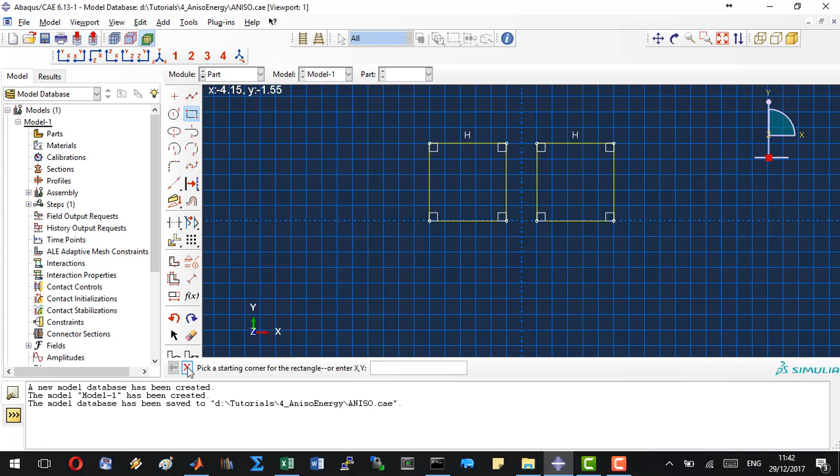Now we are at the sketch module. Let's create two elements. The first one will be 0.2, 0 until 1.2 and 1. The other starts at minus 0.2 and extends until minus 1.2, 1. When this is ready, click on the red X and click done. We can see that in one part we have two elements.

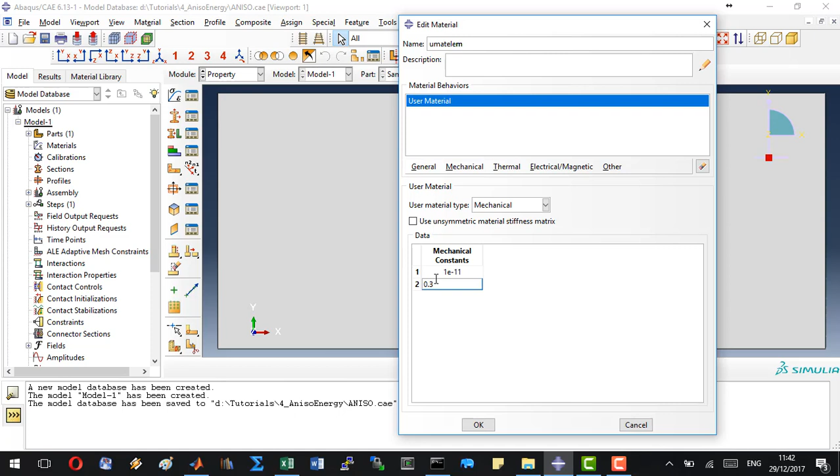These are going to be then processed further on. Let's click to the property module. Let's create our UMAT element where we have a user material with a very small stiffness and an arbitrary Poisson's ratio. We will add solution dependent variables as usual. This is going to be 16 as well.

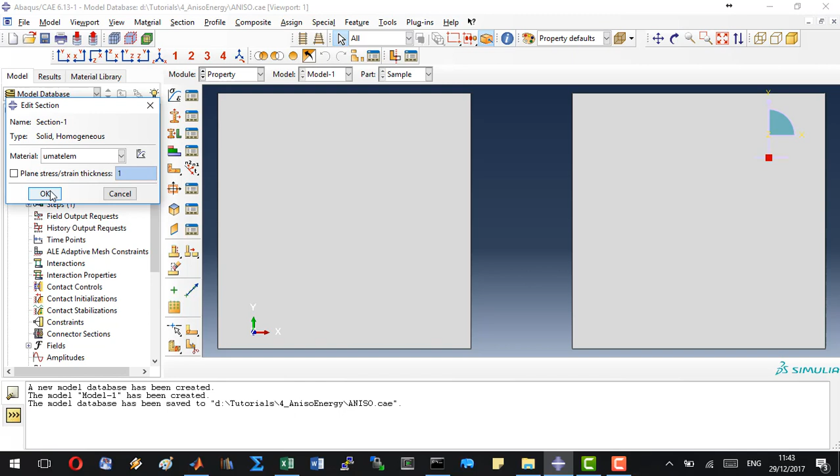Let's click OK. Let's create our section. This can be left as it is. Click continue. Make sure that the material is the UMAT element which we created earlier. Click OK and then create and assign the created sections to the part, or actually to the sets. Here we will create two sets. First one is going to be the isotropic set. Let's select the left element, click done. Make sure that the section which we have selected is section 1.

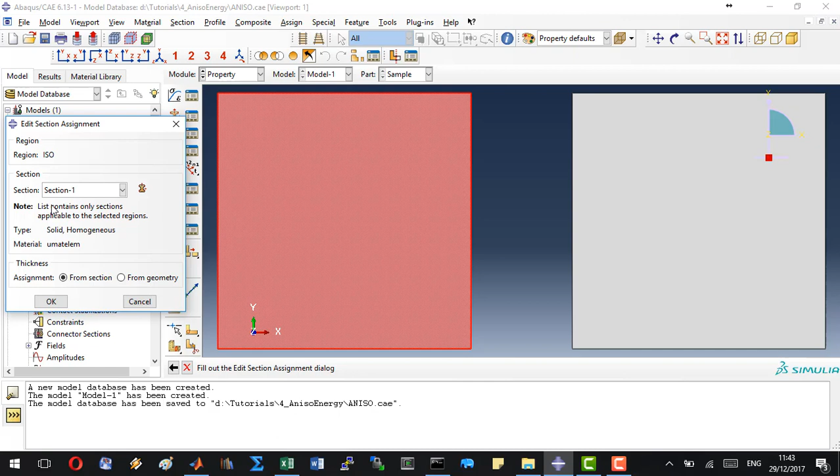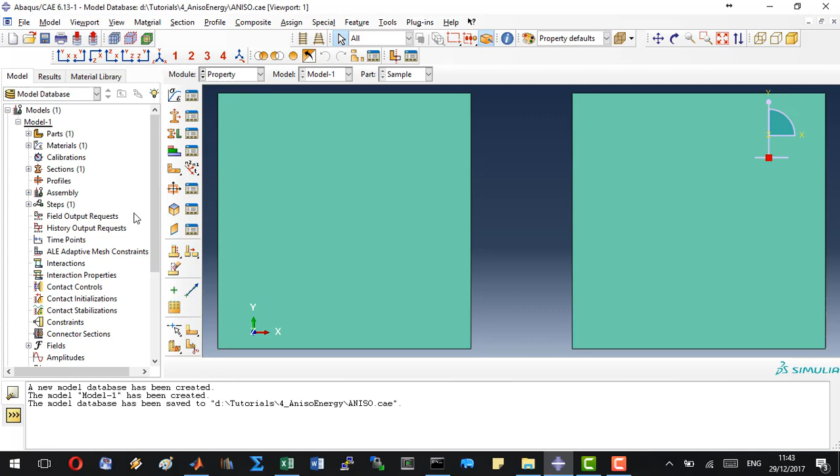The second one is going to be the anisotropic set. Select the right element, and click done. And click OK. We do not have any other sets to select, so terminate the command. If we go to the assembly module, we add the assembly by creating an instance. We shall accept everything. Let's click OK. When we are at the set, we will see that we made two different sets. These sets are going to be then assigned with the material properties in the MATLAB file later on.

Let's create additional sets where we will have the boundary conditions. The first one will be the bottom. Here we can select both bottoms because we will have the same kind of constraint. By double clicking on the set menu here, we have sides, click continue, select all 4 sides by holding the shift key. Yes, they are highlighted. Let's click done, and the top finally. Similarly, click continue, select the first, hold the shift, and select the second one, click done. So we can see we have a bottom set, a side set, and the top set.

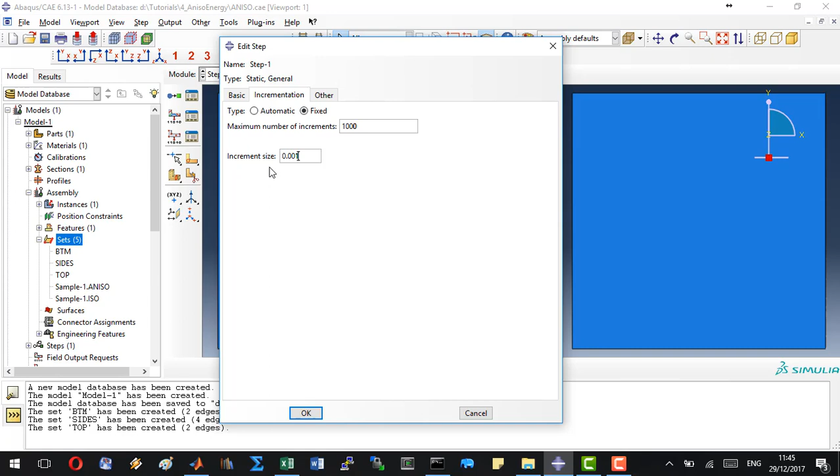In the next module, we will create the simulation step, the analysis. This will be a static general analysis. By clicking continue, we can set the incrementation, which will be, as usual, fixed. Let's have 1000 increments with 0.001 step size. Click continue. Don't forget to save your model. The output we request shall be the displacement and the reaction forces. Click continue and dismiss this window.

Step now on the load module, where we will create the boundary conditions. Create a boundary condition, name it the bottom boundary condition, which will be a displacement rotation boundary condition. A pre-made set will be used to assign this. This is going to be the bottom. Continue.

Here we will constrain the translations, the displacement in the y direction, which is the second direction. This will remain 0. Then we will add the side boundary conditions, which is going to be a displacement/rotation boundary condition again on the side set, where we will constrain the x directional displacement, so the first degree of freedom. We will see all 4 sides are now constrained.

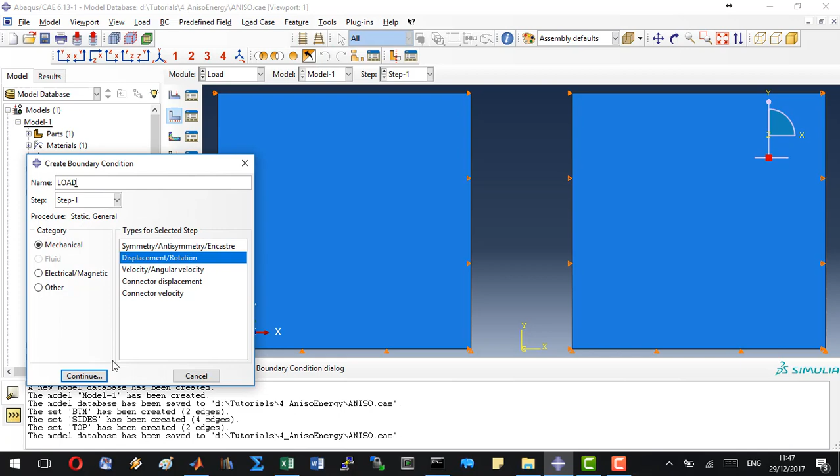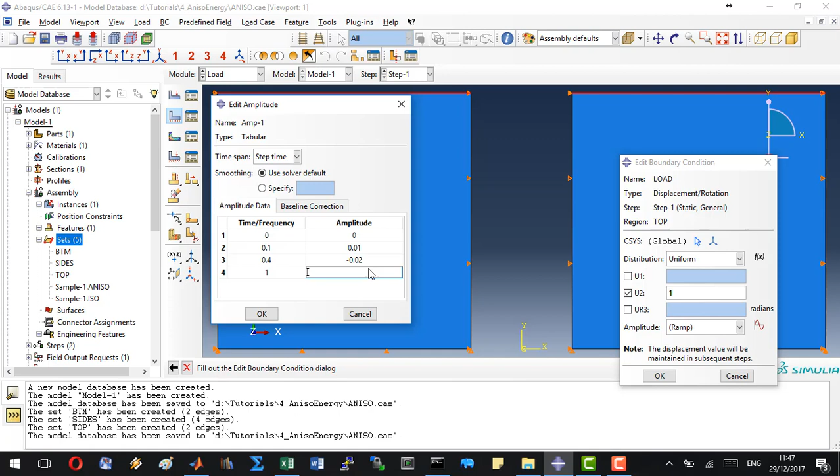Now we will add the load on the top. Let's scroll down, select top. This will be elongated or compressed in the second direction with an amplitude of 1. However, we will define a table here. At 0 time, we will have 0 amplitude. At time 0.1, we will have 0.01 amplitude. At 0.4, we will have minus 0.02 amplitude, and finally at 1 we will have 0.04 for the amplitude. Let's click OK. Make sure that you select your actual table and click done.

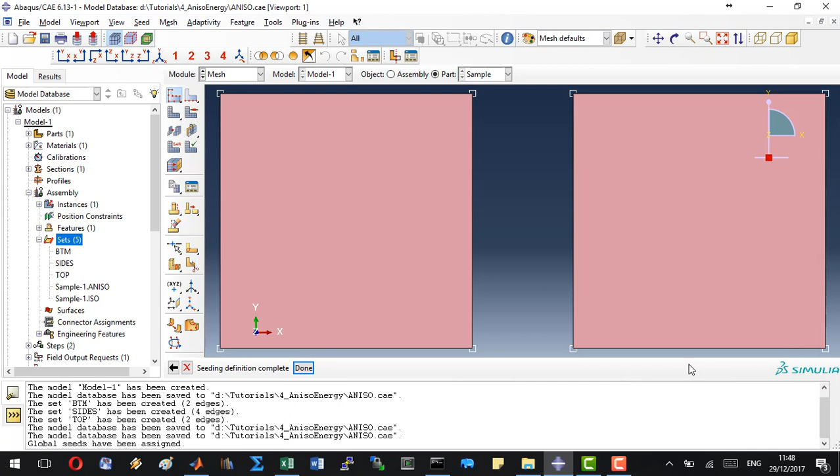Save your model. Now go to the mesh module, where we will assign the mesh to parts. Here let's add a basic seed where the size is 1. Thus we will have only 2 elements. Mesh the part and click yes. Now we are ready. Go to the job. Let's create your job. Let's name it aniso. Let's click continue. OK. In the job manager, ask Abaqus to write an input file, and then go to the MATLAB program. Here we can see that the input file has already been created.

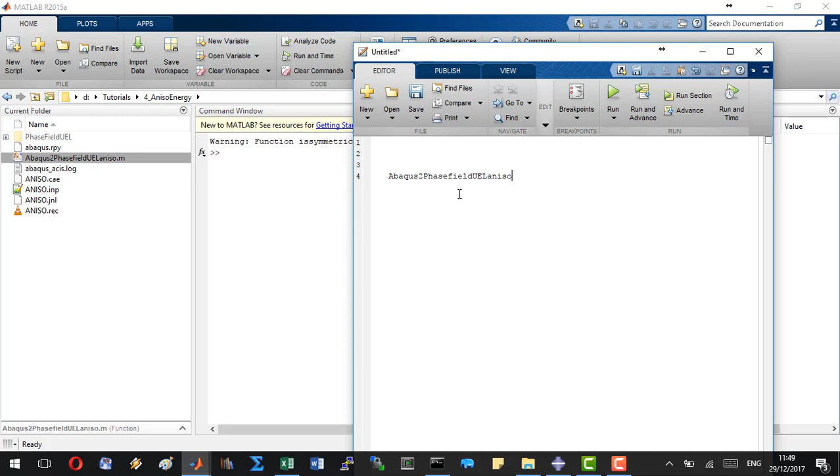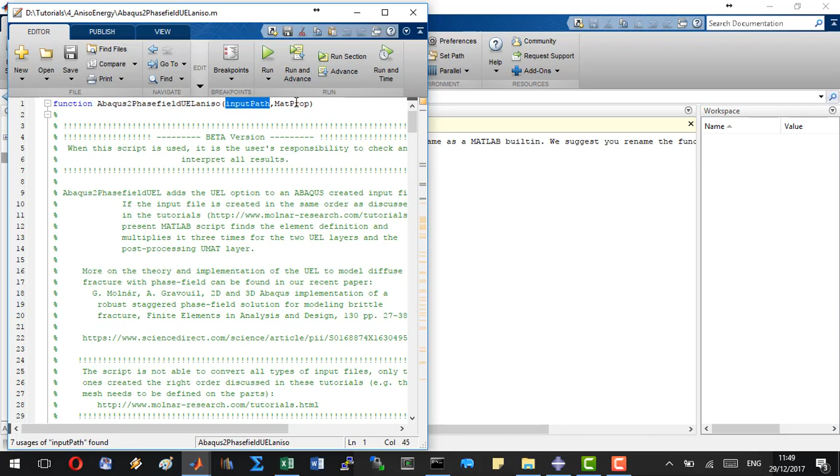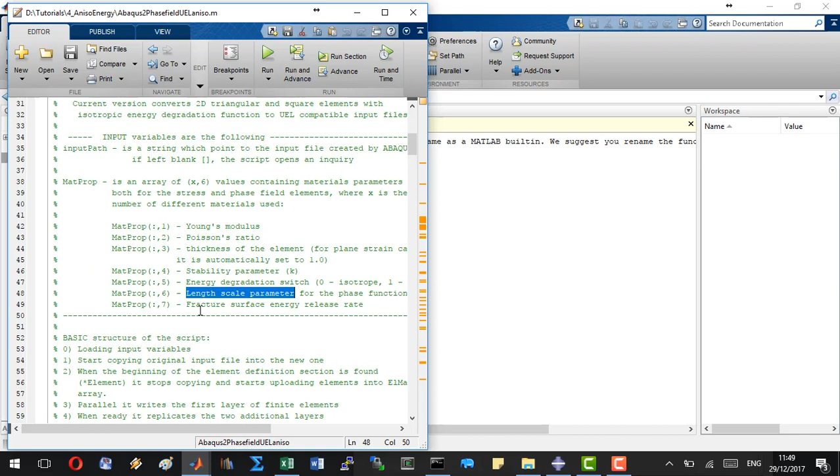Make sure that you downloaded the Abaqus script with the new Fortran file with the anisotropic energy degradation. Let's create a new script. This will make our lives easier. Let's type Abaqus to phase field UEL aniso. What do we need in this file? Let's open it. First, we will give the name in a string, the input file, then the material properties. Here we need to give 7 material properties: the Young modulus, the Poisson's ratio, the thickness of the element, the stability parameter, and the additional parameter is a switch variable which decides if the energy is going to be degraded in an isotropic or in an anisotropic way. And then the usual length scale and fracture surface energy release rate.

So go back to our file, let's save it, let's name it test. The name of the input file is aniso.inp, where we will have the material parameters, and this is going to be a matrix. Material parameters, which will have 2 lines, as we had 2 materials in the original model. First, we will have Young modulus, Poisson's ratio, the thickness of the element, some kind of stability, then the switch.

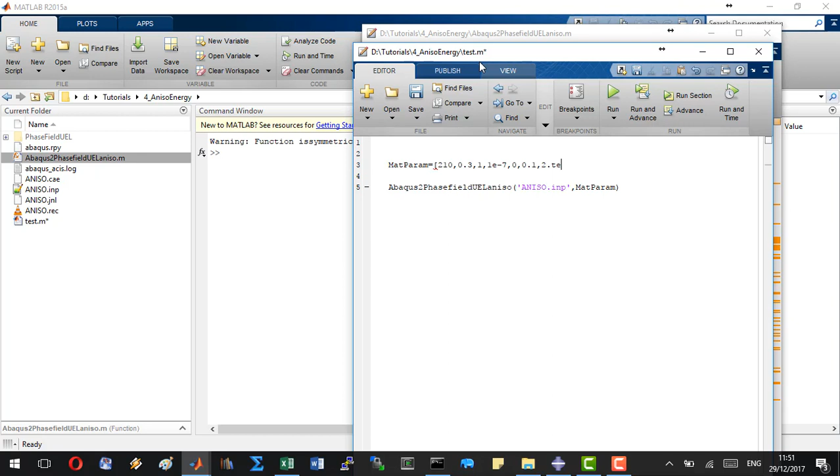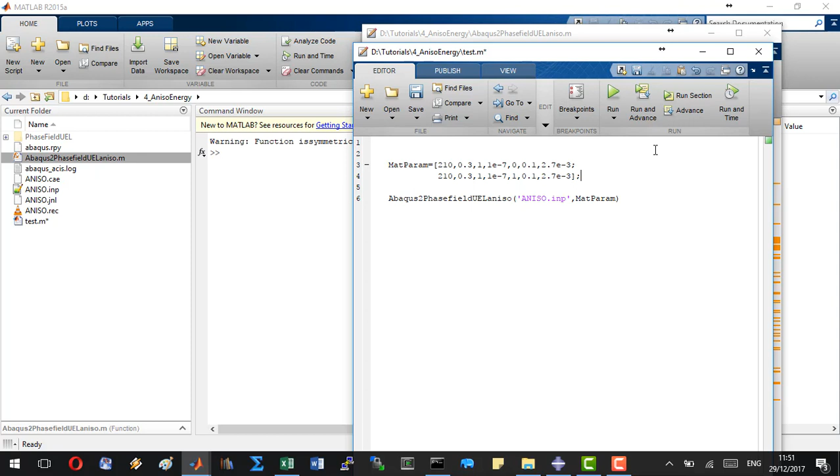The first element we defined is the isotropic energy degradation element, so we will have 0 here. Then let's have 0.1 for the length scale parameter and 2.7 times 10 to the minus 3 for the fracture energy release rate. Then click enter, and let's add the second material, which is going to be almost the same. However, we will change the degradation to anisotropic now. Let's close this matrix. Theoretically, we have all the material parameters we need, and run the script.

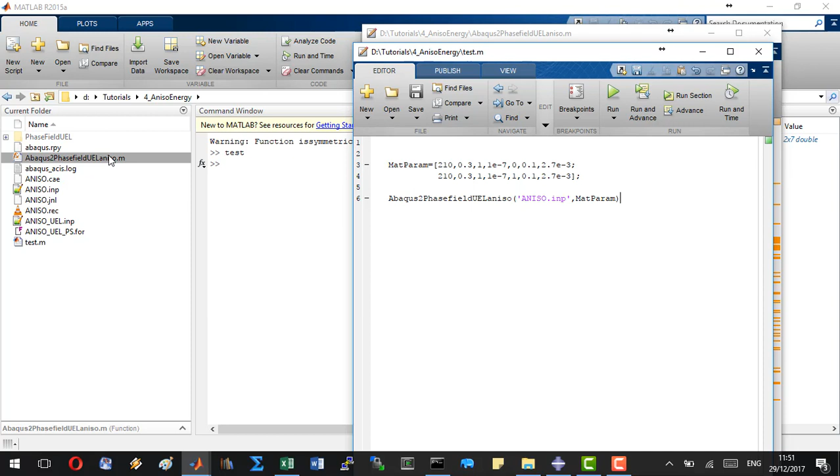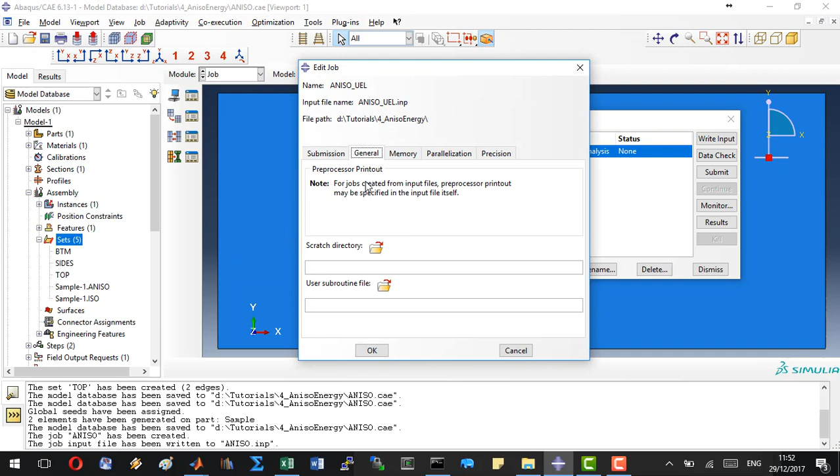After running the script, the MATLAB file will create the new input file with the Fortran file, which we can then use in Abaqus. Let's create a new job, use an input file, select the newly created input file, click continue, in the general tab select the Fortran file for the subroutine and click OK. Now submit it, and we will see that it is going to be ready in no time.

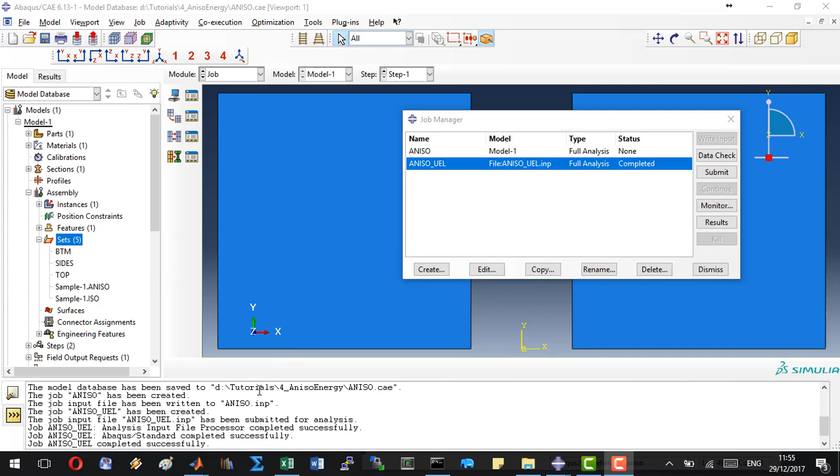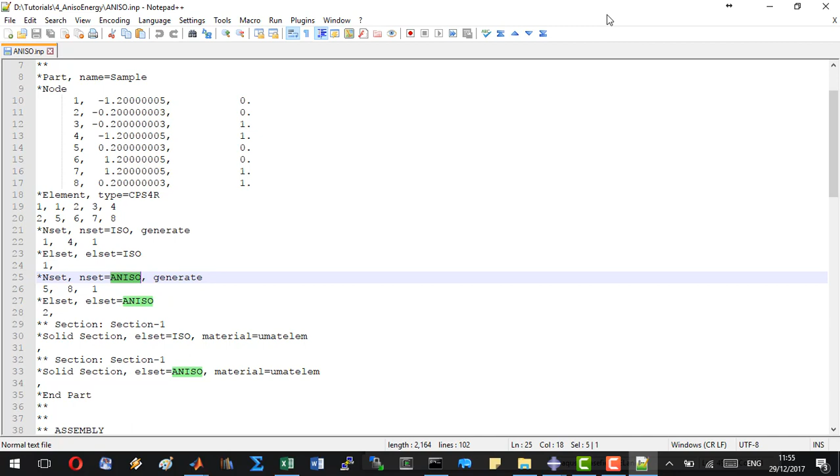One additional comment before watching this result file concerning the material definition with the sets. These materials are given in the same order as we defined the original sets. So when we open the original input file, we will see that first we define the left material, which is going to be the isotropic material, and then secondly we defined the anisotropic material. So we have to keep the same order here as we did in the original definition in Abaqus. Now we are ready to view the results. Click on creating an XY data.

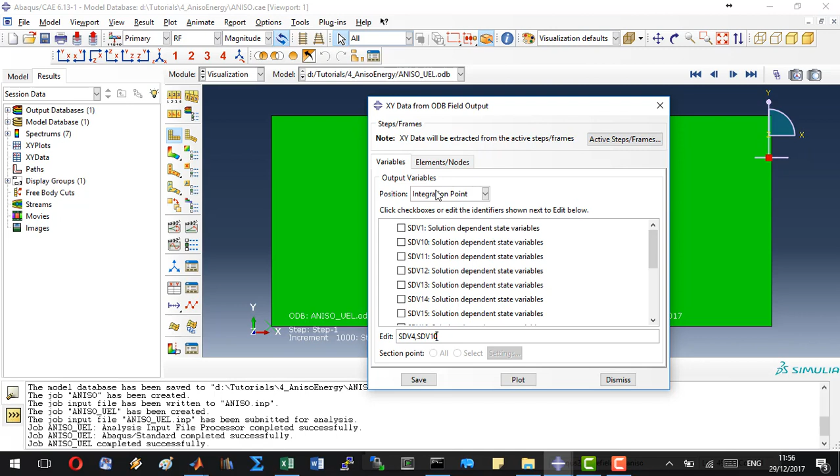From the ODB field output, click continue, select the Y directional strain, which is the 4th solution dependent variable, and the 10th, which is going to be the stress in the same direction. Leave it on the integration point. In the element selection, edit the selection and first highlight the isotropic energy degradation, and let's click plot.

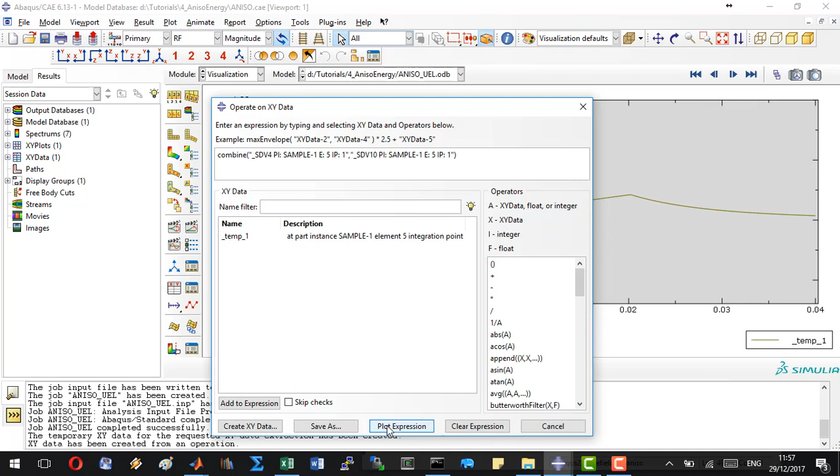Dismiss this window. What we can see here, if we combine the two data, so the strain and the stress, let's see, combine, first select the strain, then the stresses, plot it, cancel, we will see that after a certain loading, when the degradation starts to appear, we decrease our stiffness and both our stress to a certain point.

Then when we return, we inverse the deformation, so we start to compress our material, it goes back on the same slope, then reaches approximately the same strain value and stress value as we had under extension, and the material starts to degrade further on. And when we inverse the deformation, so we start to extend the material, it will remain elastic until the same strain, however on the negative extended part, and then degrades further on.

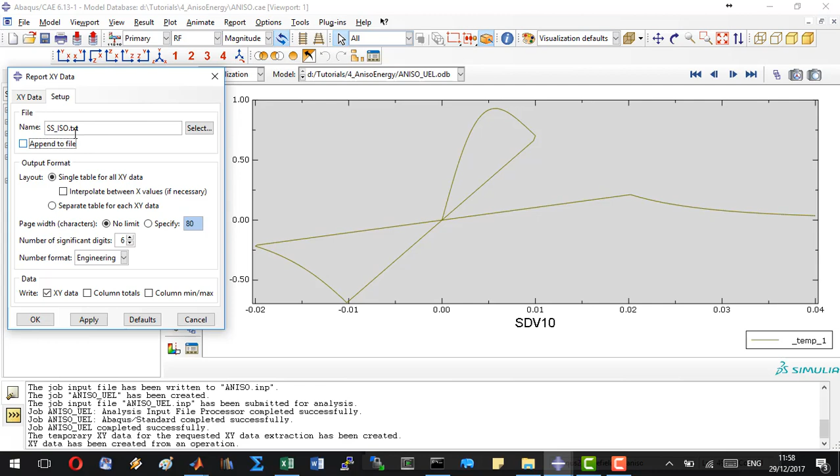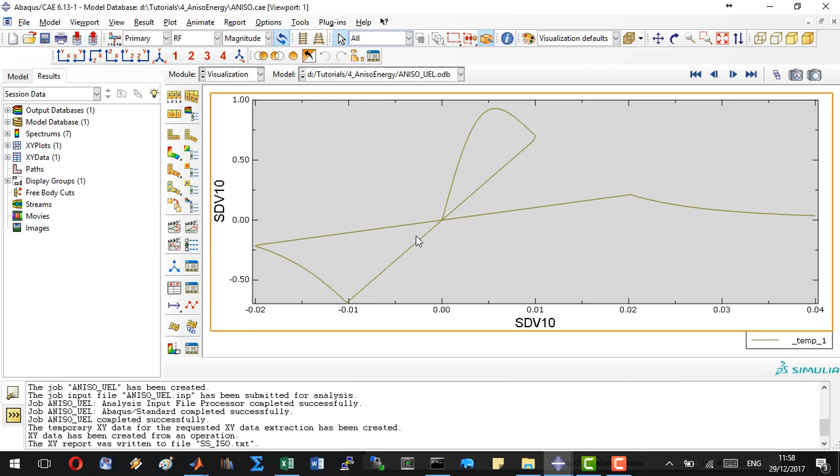Let's report this into an XY data, select this temporary data which has been plotted, click on setup, and let's say stress strain isotropic dot txt. Let's not append, and then click OK. This simply created us a txt file where we have the stress data as function of strain. Now let's go back to our element.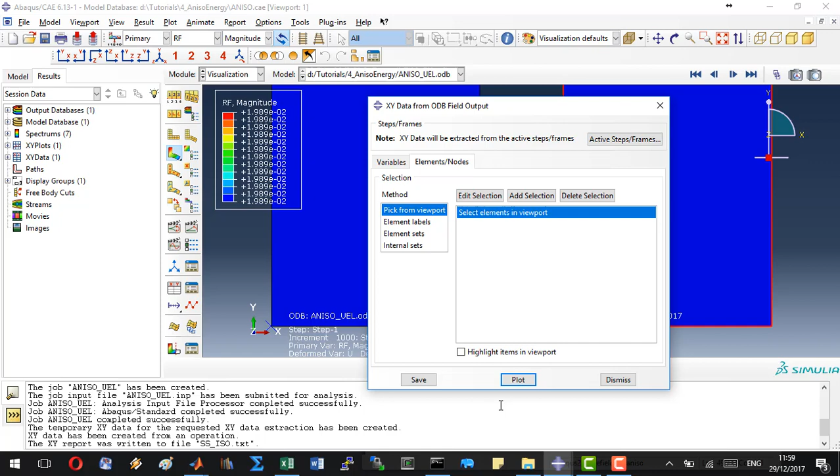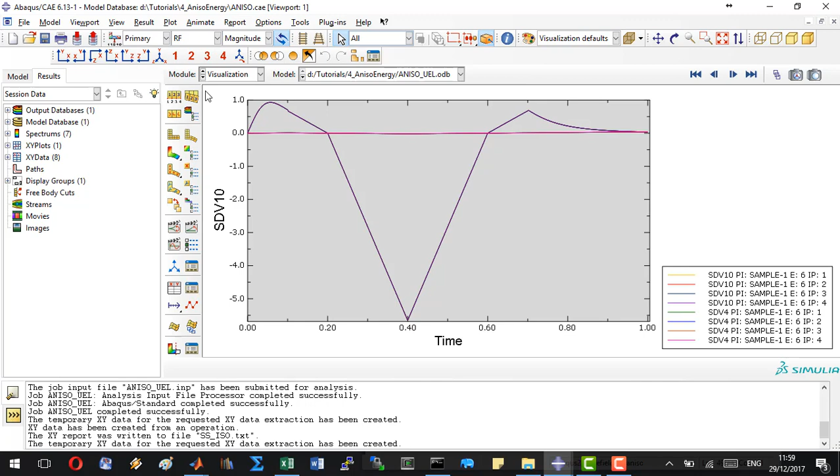We do the same for the right element. We leave the 4th and the 10th solution dependent variable. Let's go to element, edit selection, select the right one, and click plot. Dismiss the window. We can immediately see that on the compression side this remained elastic. Let's combine the two data. Click continue, combine first the strains and the stresses, and plot the expression.

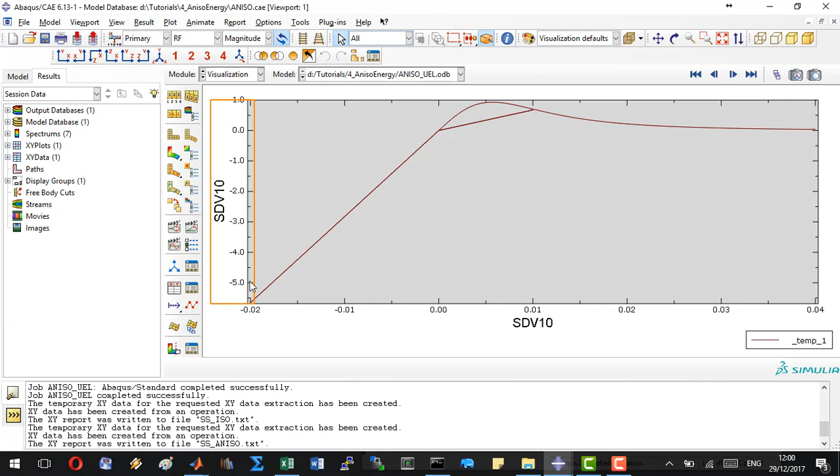Exactly after the extension, after degradation, when we start to reverse our deformation, we return to 0, and then we achieve the same kind of elastic stiffness as we had initially. Let's report this data as well. Make sure that the temporary data is selected. Go to setup, and this is going to be an anisotropic txt. Click OK. Now we can go to an Explorer window, and we can select these two files.

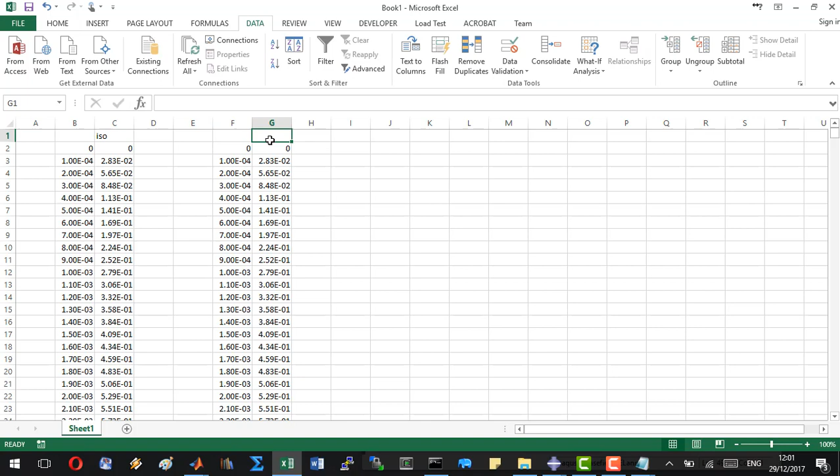First the isotropic, select all, tap Ctrl C, go to an Excel window and paste it. Click on data, text to column, click next, and select space as the delimiter. Click finish. We will do the same for the anisotropic one. Select all, copy it, go to the Excel window, and now by simply pasting it we will have the same delimiters. Now delete the first two lines, shift the cells up. This was isotropic and this was anisotropic.

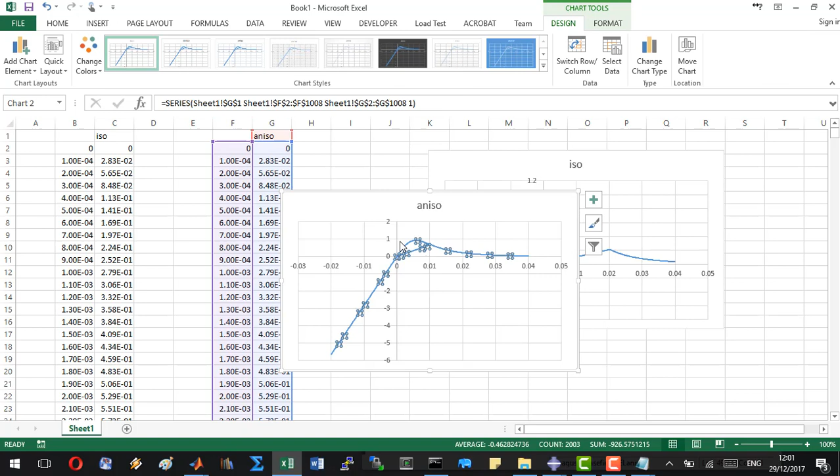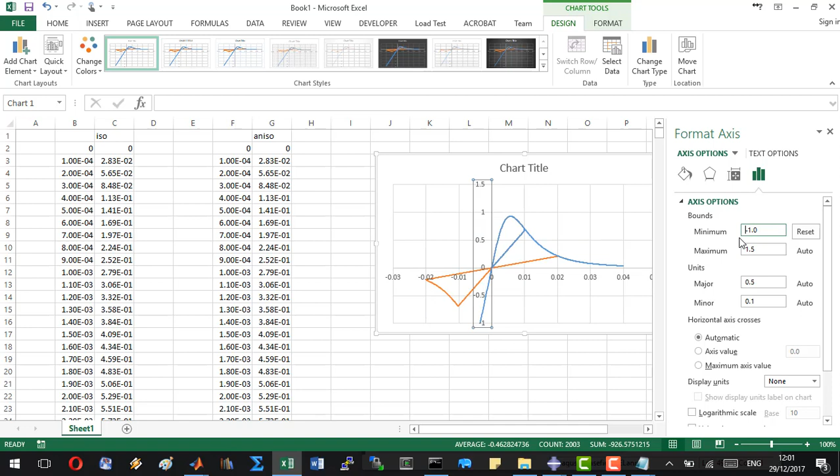Select first the two columns and insert a diagram. We will do the same with the second one. Select this curve, Control X, select the first diagram and paste the curve in it. Let's set our limits so that we can see the data. Select the anisotropic curve and change it to black, for example, and dashed, so that we will be able to distinguish between the two curves.

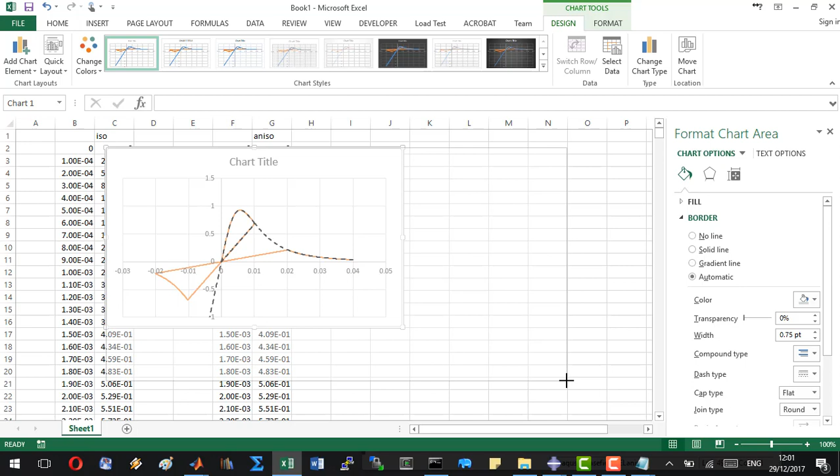What can be seen is on the extension side we have the same kind of behavior for both elements. After reversing the deformation and reaching 0, the anisotropic element will continue with the same stiffness as it had originally. However, the isotropic degradation function will have the degraded slope.

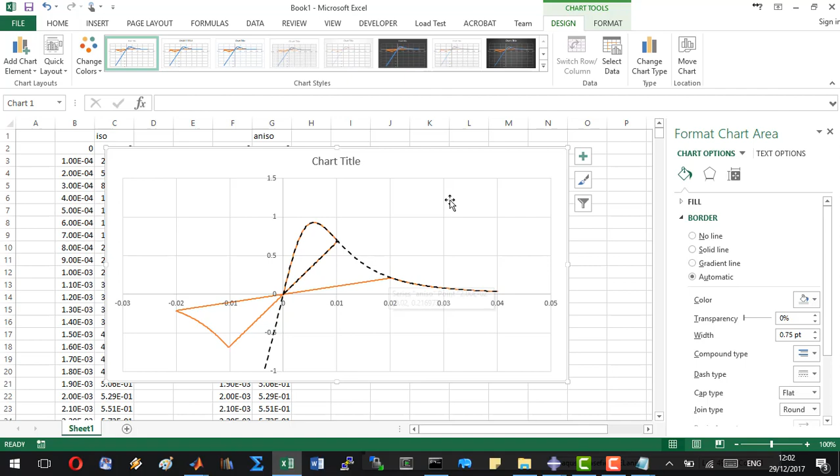It actually damages further under compression, and then when we return our load, the anisotropic function will go in the same slope as it returned. However, the isotropic one will have the slope which is further degraded on the compression side. When we reach 2% extension strain, the two curves will overlap and the results will be the same.

Finally, to conclude, in this tutorial we saw how to define different materials and how to convert them using the MATLAB script, and we compared the behavior of an isotropic and an anisotropic energy degradation element, both on the extension part and on the compression part.